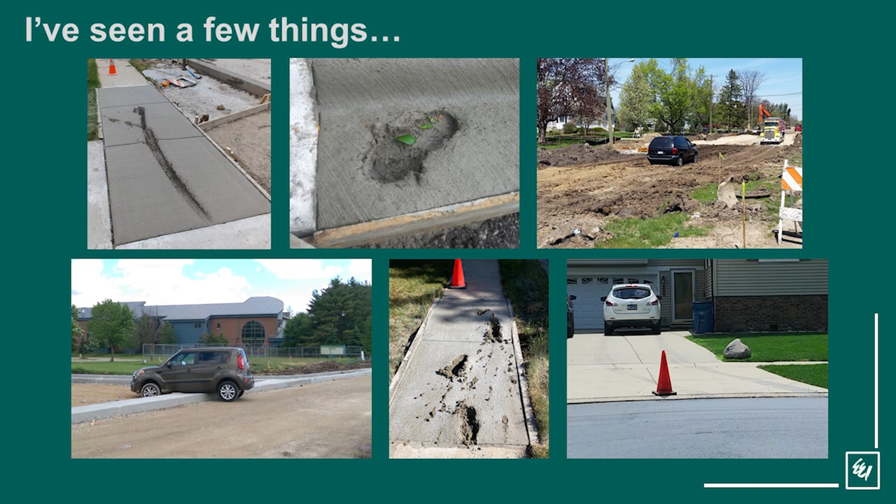So we're talking a lot about stretching your dollars. So what does that mean? Stretching your roadway dollars means no dollar goes to waste. As Brad mentioned, the cost of materials is rising, 12.6% minimum. We see it every day. Costs are constantly going up. So it's essential that the dollars that we are spending are being used effectively and in a deliberate manner. Making every dollar count is achieved through effectively implementing the design and then actively managing the construction activity. And I like to think of myself when I'm out on a job kind of like Moneyball. They set up the perfect design project, and I'm there to manage it to success. And this starts before construction even begins.

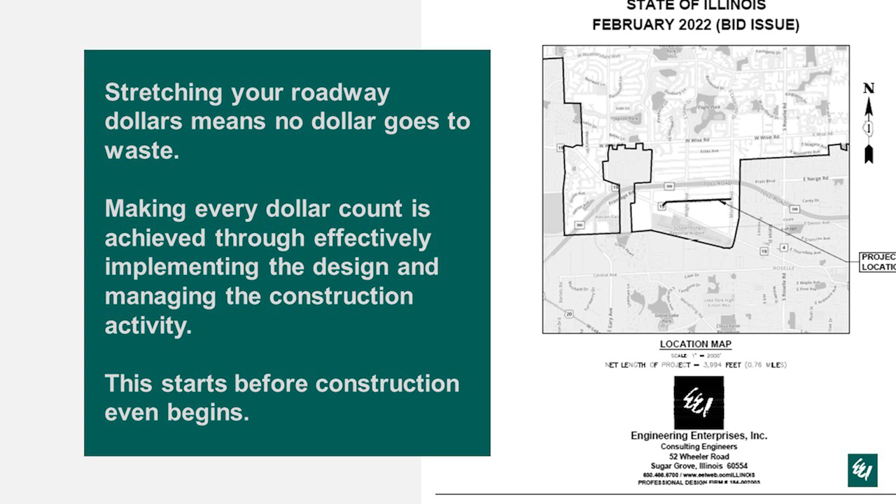So touching on a few pre-bid items, I like to have solid specs. What does that mean? It eliminates contractor arguments, limits resident complaints, and then we tend to learn from past programs. So what did we argue about with the contractor last year? And then implement that in the spec for the following year. A few examples of these, when ADA sidewalk lowering or sidewalk reconstruction became part of all the design projects. When you have to lower the sidewalk maybe a foot to make it compliant, where does that material go? Contractor might argue, hey, that's extra excavation. So including things like that in your spec limits arguments.

We've started implementing timelines and penalties, so not just completion dates, but maybe milestone completion dates on certain neighborhoods, or if there's schools along the way. Adding those kinds of things to your specs can help limit resident complaints. And then housekeeping standards, so making sure they don't have open holes on open curbs or open sidewalk for extended periods of time. I know that's fairly commonplace, but adding those into your specs and really holding the contractor accountable is important. And it helps move the job along as well.

Also building in flexibility. So as Joe said, we like to add fluff. I'm not a huge fan of that term. I like it to be purposeful. So things that we see year to year that constantly get overrun. Restoration is one, that's a big one. You think you replace 30 feet of curb, you're gonna have 2 feet behind the curb that's gonna be replaced for restoration. Well, if you had to raise that curb up 6 inches, now you might need to go 6 feet or 10 feet beyond the curb for restoration, things that aren't obvious when you're designing sometimes.

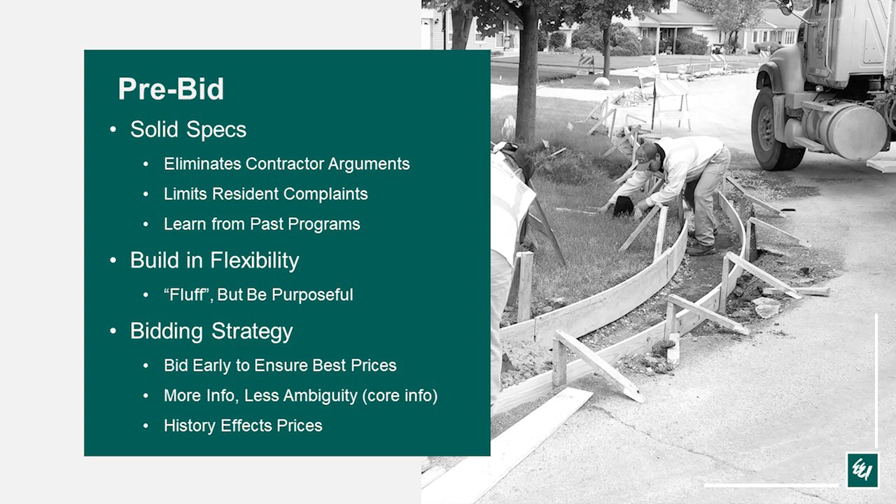And then another bidding strategy, as Joe mentioned, is that not all of our contracts require plans. So in the absence of plans, the more info you can include, the less ambiguity, the better pricing you're going to get. So some detailed information to consider: is the curb or sidewalk that you're going to replace accessible from the road? It's often overlooked. It's easy to just mark out sidewalk or curb on the plans to be replaced, but if the contractor can't reach it, they don't know that they have to bring out maybe a buggy to get the concrete there, or some sort of special truck. That's going to be an argument.

So you want to have as much accurate information as possible. That's going to get better pricing and less arguments from the contractor. And we found that contractors remember these challenges, so if you're constantly putting things in your plans where the contractor can't reach it, or it's a nightmare to do, they're going to remember those things, and you're going to see prices bump up over the years. So the more information you can add, the better off you're going to be.

And so now you've bid the project out, and you're in the pre-construction phase, okay? Ideally you're able to inspect the roadways before the design. That's not always possible. Sometimes you're adding roads late. They're covered by snow. They're covered by leaves. So it's really important for the RE to perform a field review prior to construction. So they're going to go lay out all the removal limits accordingly. Again, when you don't have plans, this is especially important.

And then oftentimes this is when residents give their input. A lot of times residents might not say anything, and then they start seeing arrows on the ground marking out some sidewalk in front of their house. They're going to have questions. They're going to tell you all the spots where it freezes in the winter that you might not know about, or where all the kids like to stand for the school bus that might need some sidewalk addressed.

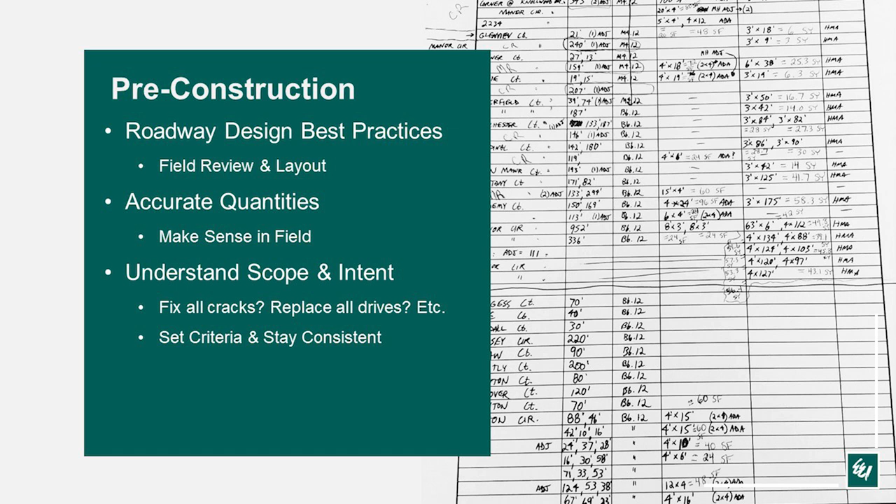That's helped us in the past. So if you have a written policy on which driveways get replaced or which curb gets replaced, it goes a really, really long way with the residents. When you say, hey, the policy is drainage issues and major failures. If you have a written policy that you can show a resident, oftentimes that limits the complaints from the resident. Then they know it's being applied consistently and that it's not like, why is Joe's driveway getting replaced and mine's not? You can clearly point to something to back yourself up.

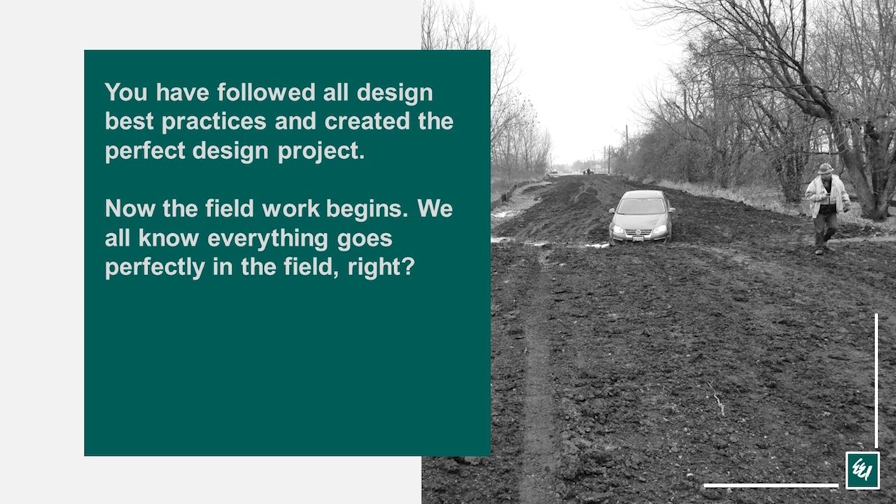That car was 500 feet down a road that was removed because Google told them to go that way. And it took 2 tow trucks to get it out. So I'm sure you guys can all appreciate that.

All right, so once you're in the field, a few things to keep in mind. Flexibility is key. Having the ability to add and subtract during construction is important based on your field observations. Being able to react in real time. So having all of your measurements completed prior to construction allows for quick reactions, and it eliminates downtime. So if you know right where your project is at all times, you can make quick reactions based on changing field conditions.

Something that we try to do is have sort of our borderline areas in our back pocket. So if you know that all of a sudden something changes and you can keep maybe a piece of curb or some sidewalk you were expecting to get rid of, you'd have a borderline area in mind that you can right away mark out and get replaced. Or the flip side, if you're starting to go over those borderline areas that would be nice to replace but maybe aren't vital, you can start scaling back in those areas.

Something else to be flexible in the field is we tend to try to do a mill and evaluate strategy. Even if the pavement management plan says reconstruct or milling and resurfacing with heavy patching, some areas may have poor PCI or look like they need a lot of patching, but it's important to mill and then evaluate. So mill the area first, utilize proof rolls or your geotech sub if necessary, but there's no sense in doing work that doesn't need to be done.

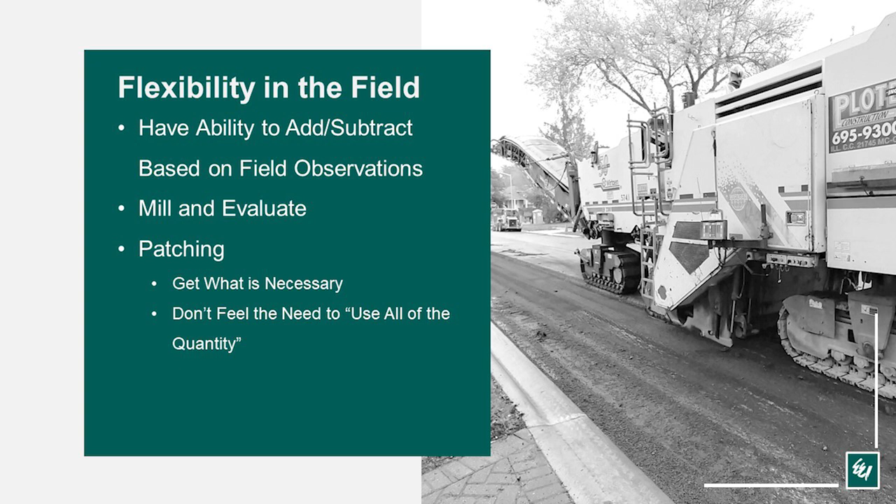So this is especially important in patching. You want to make sure to replace any required deficiencies, even if it's only small areas, but don't feel the need to use all the quantity. So I've seen REs before where you have 1,000 square yards of patching on the job and they feel like they have to go mark out 1,000 square yards of patching. That's wasting your money. So only get what's necessary and don't feel the need to just use all of your quantity.

So identifying patching needs prior to milling is an inexact science. Some roads look terrible before you mill it and look great afterwards. So just being prepared to adjust based on field conditions will produce the best end product and eliminate unnecessary spending.

So similar to consistency during design, staying consistent with the scope and intent during construction is important. Oftentimes it's hard to know when to stop. So having a consistent scope is important. Remaining consistent with your pre-established criteria. If the scope of the project is street repair, we're focusing on roadway dollars. We try to only get essential ancillary items. Some villages do replace everything, which is, if you've got the money to do that, that's fine.

But if you're focusing on stretching roadway dollars to improve your overall road system, only repairing essential sidewalk and then not deviating. If that's the plan, don't deviate. It's easy to kind of get in the mode of marking out every little crack and every little bump along the way, but you really want to get your major areas and not deviate while you're laying things out, and keep the focus on the roadway.

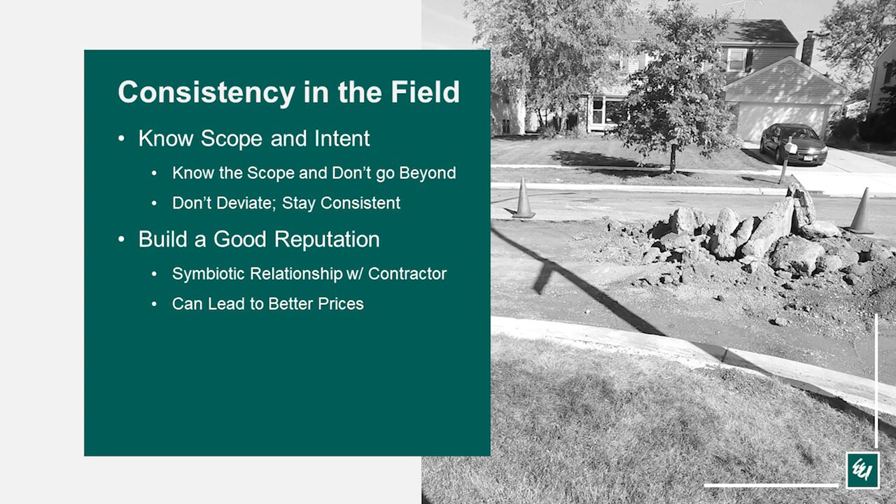Or avoid large deviations from planned work. Contractors tend to hate that. One, you're going to get a huge price if you're deviating, if you're trying to do extras. We all know how that goes. They can blow up in an instant. And we've seen with some of our programs, for instance in Schaumburg, where we're being consistent every year, you see those prices kind of go down or stay low every year. You're not seeing huge increases because they know they're going to show up. They're going to have a consistently run program with good design and good working relationships.

An often overlooked part of construction is public outreach. You know, it's easy to forget, but the reason that we're doing all these projects is to better the community for the residents. And so taking care of as many problems as efficiently as possible is a good way to stretch your money, and you can do this with public outreach.

Keeping the residents involved and informed allows the most efficient construction. The more proactive we can be, the greater chance the residents are going to be aware of what's happening, the greater response times we can get to their calls and their questions, the happier they're going to be. Why is this important? Well, it minimizes mobilizations by the contractor and subs.

There's nothing worse than you get through an entire street, then a resident calls, hey, my driveway needs to be fixed. You kind of evaluate it, yeah, it does. Now you have to do another mobilization for a concrete pour. Or you go to pave a street and there's a car parked on it. So having resident involvement in public outreach minimizes slowdowns, gets rid of those parking issues, gets rid of residents driving on prime.

And without fail, every time I show up on a street to do some sort of road work, there's a guy moving or there's a guy having a party, and you plan to mill, and now there's 40 cars parked on the street for a birthday party. It seems to happen every year, and the more public outreach you can have, the less likely that's going to happen.

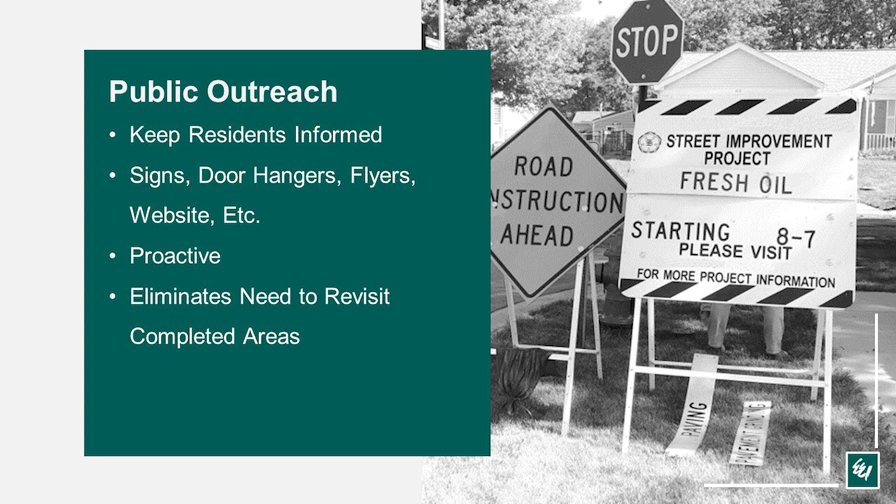So there's nothing better than doing a good job on a project. A person is happy with how it goes. They know their tax dollars are being spent wisely and they're not wasted. And what this does is you get a greater buy-in for future projects. So when you want to raise taxes or do extra work or what have you, having other residents say, they do a great job out there. They really spend our money wisely. They're giving us a great product. It was very smooth. You get that greater buy-in for future construction.

But no matter how well a project is planned, unexpected changes do occur. It's construction after all. So what do we do when things do not go as expected? It's important to have a plan and be prepared to pivot. So we like to do constant budget tracking. This gives a snapshot of the project budget on a daily basis and allows for real-time decision making. Is the project trending over or under?

And does this allow for adjustments to be made not only on our program, but elsewhere in the village or in the municipality? So if you come to me and you have a water main job going on, you say, how's our budget looking on this road program? And I say, man, we got $30,000 that we're saving right now, projected to be under. That water main job, if it's going a little bit over, you might breathe a little easier, not have to shift things around as much, have some extra money in your pocket. So it just allows for adjustments all over the municipality.

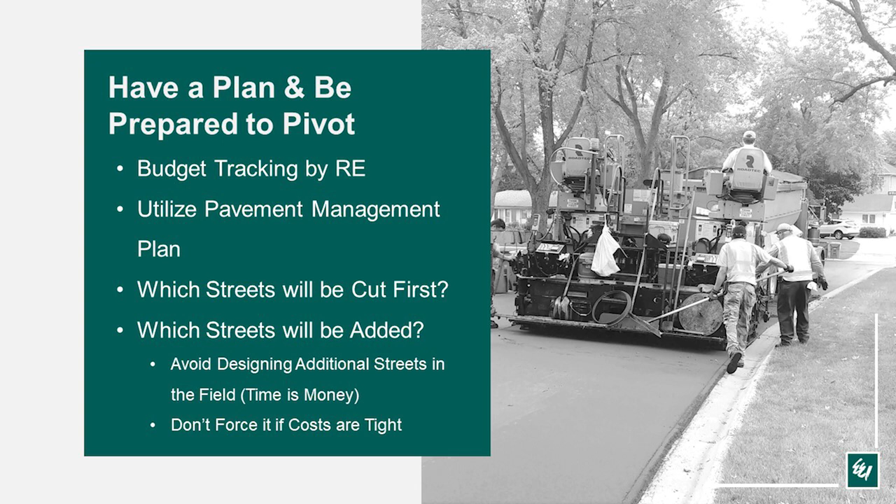We find that this is often a good time. You have a dead-end street that's in terrible condition that you haven't had a chance to get to yet, or it's kind of not optimal as part of a project. You have an extra $50,000, get that extra street taken care of, get that dead-end street taken care of. Or in the project area, if you have a minor bike path that needs to be replaced, things like that, you can kind of tack on at the end and really make the most of your money. We found contractors typically appreciate the extra work, and so they're often willing to hold prices and add on that extra work for you.

If conditions are tight, though, don't force it. You know, Murphy's Law seems to always apply. If you've got $50,000 and you're trying to do $45,000 worth of work, it seems to always end up being $60,000 at the end of the day. So don't force it, but if you've got extra money, being prepared to use it is a great strategy.

And then something that's often overlooked as a strategy to stretch your roadway dollars is QA testing. So oftentimes we think of it as only minimal testing to ensure that you have the right materials, maybe 25–30% of what the contractor's testing. But accounting for not only the minimum required testing, but additional testing is a good way to ensure that your materials are meeting spec, and not just eking over the specs, but making sure that they're really right there in the middle. It's essential during late season paving, if temps are dropping, making sure that your materials are in spec.

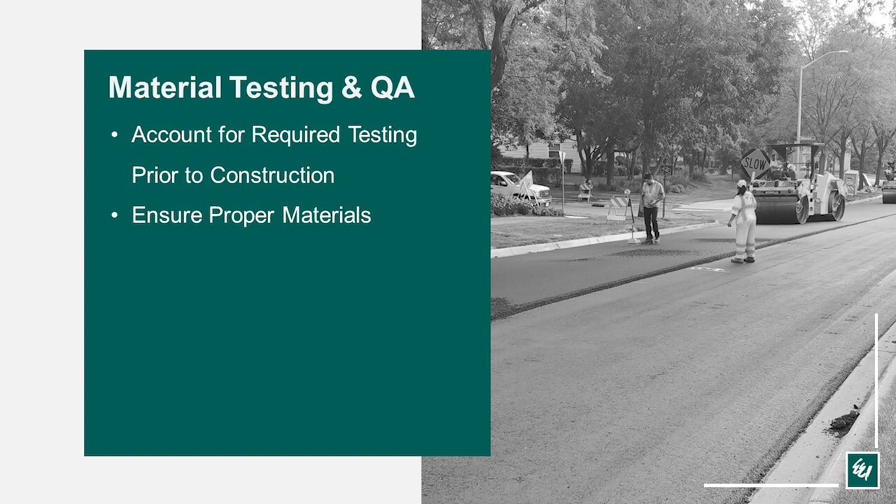So from time to time, come springtime, a road starts failing prematurely. Hey, why is that? Well, if you've got a lot of QA testing to go back on and see, hey, were we meeting spec? Was it just meeting spec? Was everything good? Were there other things at play here that caused this road to fail? So small upfront investments in QA can definitely save you large investments in the future.

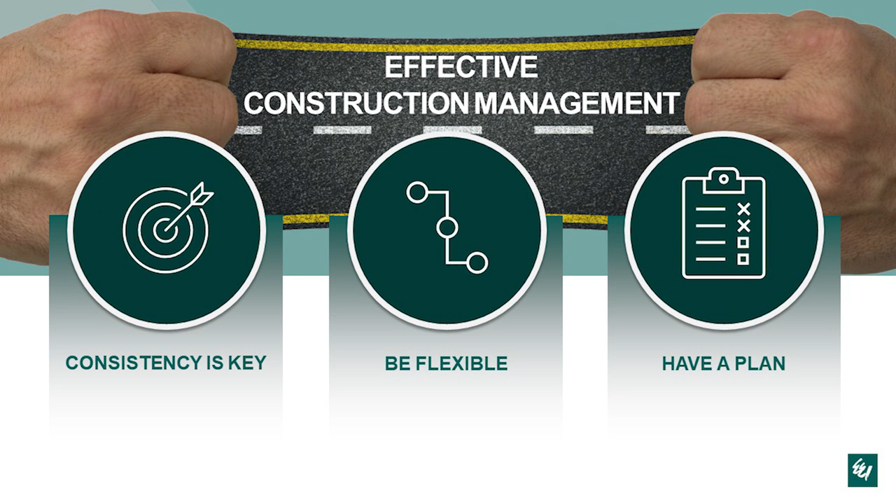So I just want to leave you with these points. Consistency is key. Consistency in intent, consistency in scope, consistency in strategy, and being consistent with your public outreach. Being flexible, so remembering to mill and evaluate and not use quantities unnecessarily. And then always having a plan, being able to adjust, and really actively managing your construction project.

So I know I just threw a lot at you, so I open up for any questions, funny construction stories I always love hearing, anything of that nature. That's a perfect presentation. All right, any questions for Kyle?

You have your sod restoration issues. How do you typically handle restoration in the field to make it more effective? We seem to struggle every year with restoration. Either the sod's bad or the seed blanket didn't take, and you're just fighting every year. Do you have any strategies to make that better?

Nothing specific that I would lean on. I mean, we see that too for a lot of projects. I think being consistent with making sure that the contractors are not allowing weeds to grow, things like that, and then trying to just inform the public, getting a little bit of buy-in from the public, either watering or picking weeds or just themselves keeping an eye on it can really help. I know the contractors are responsible for it, but the public giving a little extra watering seems to go a long way to get sod to establish or grass to grow.